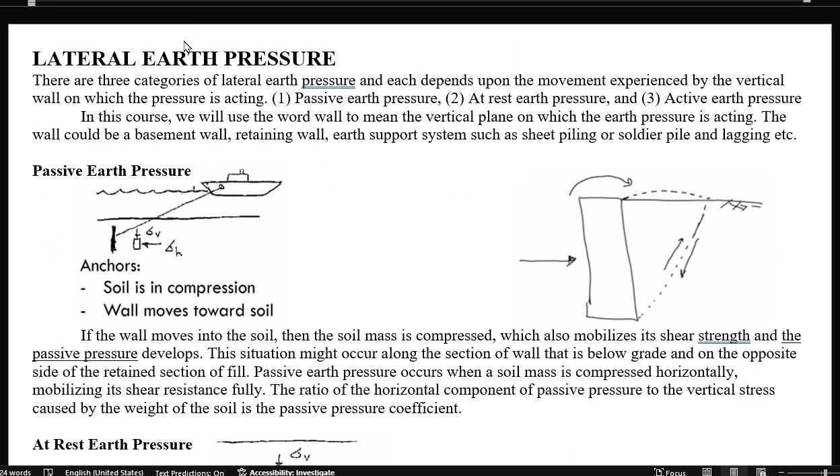And lateral earth pressure is related to the vertical earth pressure by a coefficient termed as at-rest earth pressure coefficient, or that is K sub O, active earth pressure coefficient, or K sub A, and passive earth pressure coefficient, or K sub P. Itong tatlo refers to the three lateral earth pressures, which are passive, at rest, and of course, active. The lateral earth pressure, sigma H, is equal to the vertical earth pressure or sigma V times the appropriate earth pressure coefficient, or this equation.

Yung K, yan yung coefficient. The earth pressure coefficient K is equal to the ratio of the lateral earth pressure, sigma H, to vertical earth pressure, sigma V. Or K is equal to horizontal all over vertical.

K depends on the type of horizontal loading. Is the soil at rest, under compression, or passive, or under tension, or active?

Depending upon whether the soil is loose sand, dense sand, normally consolidated clay, or over-consolidated clay, there are published relationships that depend upon the soil's engineering values for calculating the at-rest earth pressure coefficient.

One common earth pressure coefficient for the at-rest condition in granular soil is K sub O is equal to 1 minus sine phi, where K sub O is the at-rest earth pressure coefficient and phi is the soil friction value or angle of internal friction.

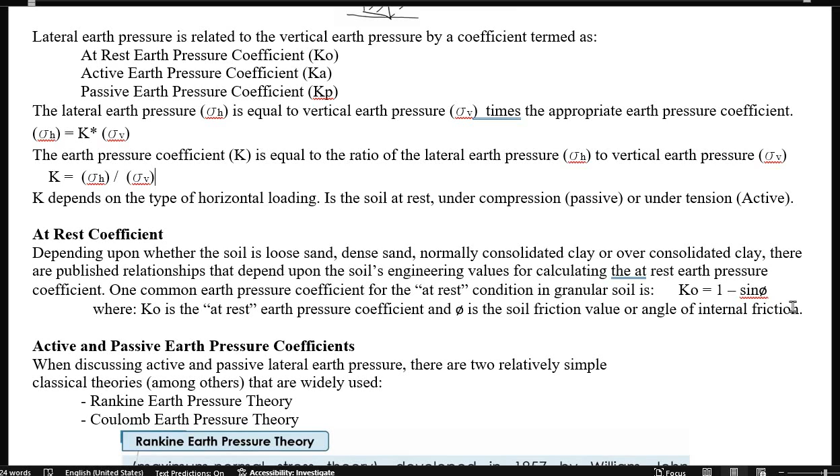Now let's talk about the active and passive earth pressure coefficients K sub A and K sub P. When discussing active and passive lateral earth pressure, there are two relatively simple classical theories that are widely used. So we have Rankine earth pressure theory and Coulomb earth pressure theory.

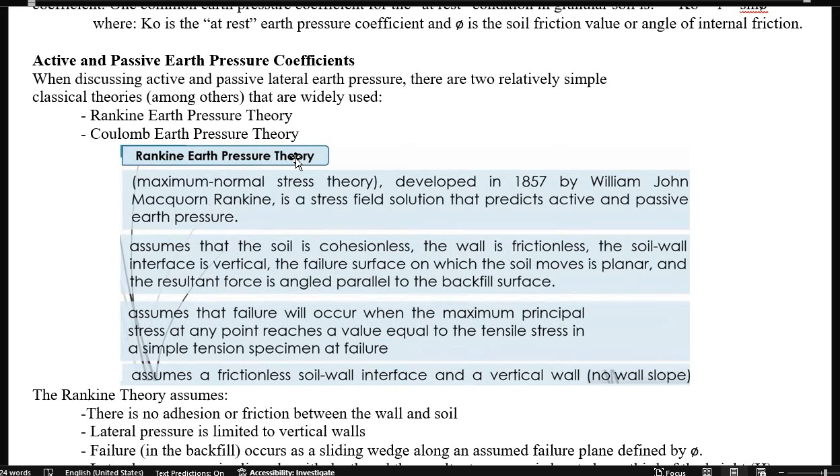Sa Rankine earth pressure theory, it is known as the maximum to normal stress theory. It is developed in 1857 by William John Macquorn Rankine. It is a stress field solution that predicts active and passive earth pressure.

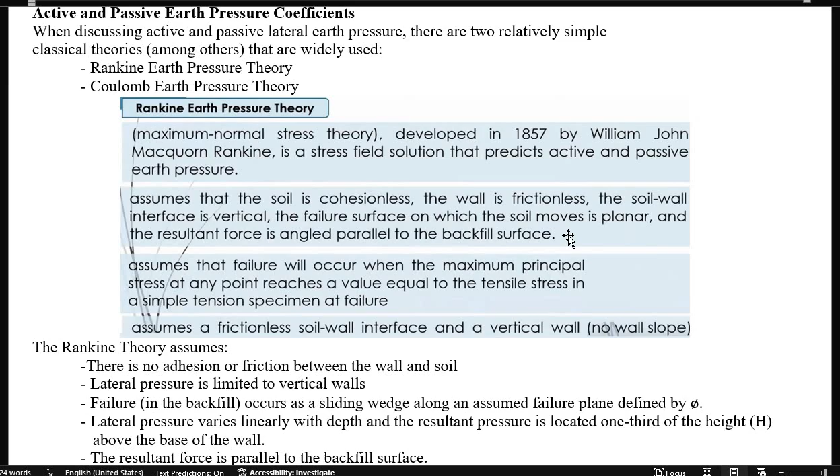It assumes that the soil is cohesionless, the wall is frictionless, the soil-wall interface is vertical, the failure surface on which the soil moves is planar, and the resultant force is angled parallel to the backfill surface. So, the contact between the wall and the soil is assumed to be frictionless. And then, itong contact plane niya is vertical. Tapos, itong diagonal plane or yung failure plane is planar or flat.

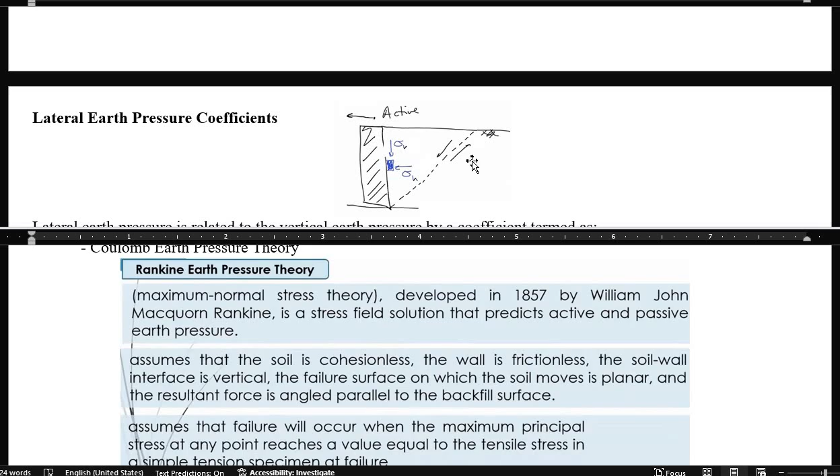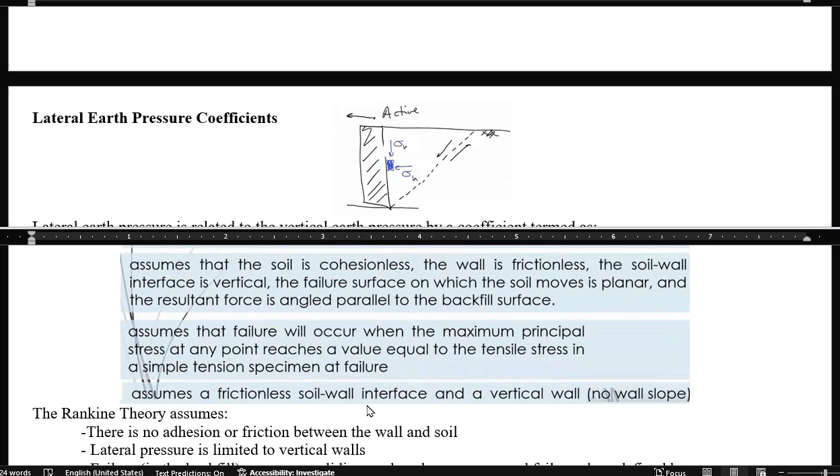It assumes that failure will occur when the maximum principal stress at any point reaches a value equal to the tensile stress in a simple tension specimen at failure. It assumes a frictionless soil wall interface and a vertical wall or no wall slope. The Rankine theory assumes that there is no adhesion or friction between the wall and soil. Lateral pressure is limited to vertical walls.

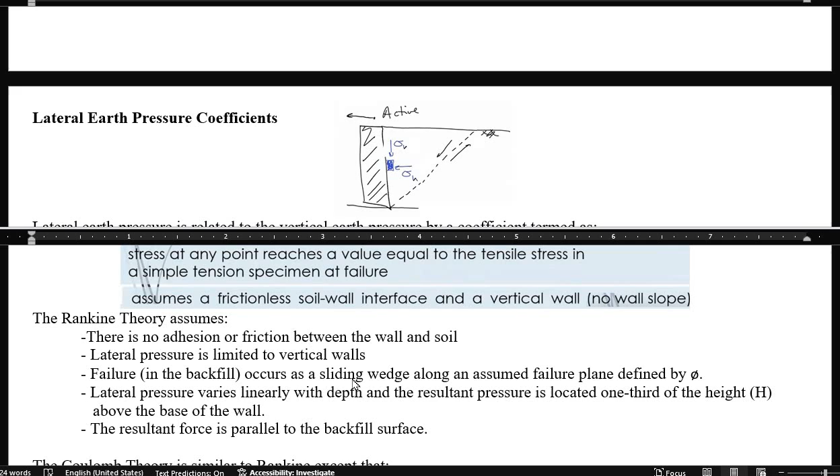Failure in the backfill occurs as a sliding wedge along an assumed failure plane defined by phi. So yung sliding wedge na yan, eto yon. Tapos yung angle of internal friction phi is eto. It is the angle formed by the failure plane to the horizontal.

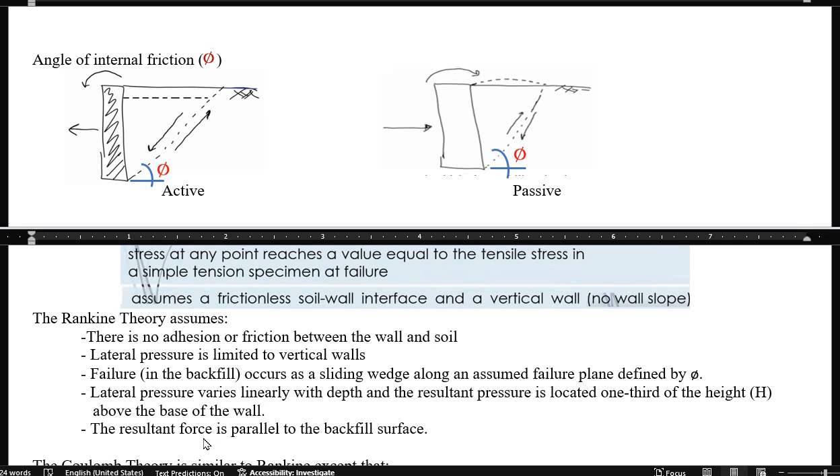Lateral pressure varies linearly with depth and the resultant pressure is located 1/3 of the height. Take note na yung centroid ng triangle is 1/3 above the base of the wall. The resultant force is parallel to the backfill surface.

Next is the Coulomb earth pressure theory. It is similar to Rankine except that there is friction between the wall and soil and takes this into account by using a soil wall friction angle of delta that ranges from phi all over 2 to 2/3 of phi, and delta is equal to 2 phi all over 3 is commonly used.

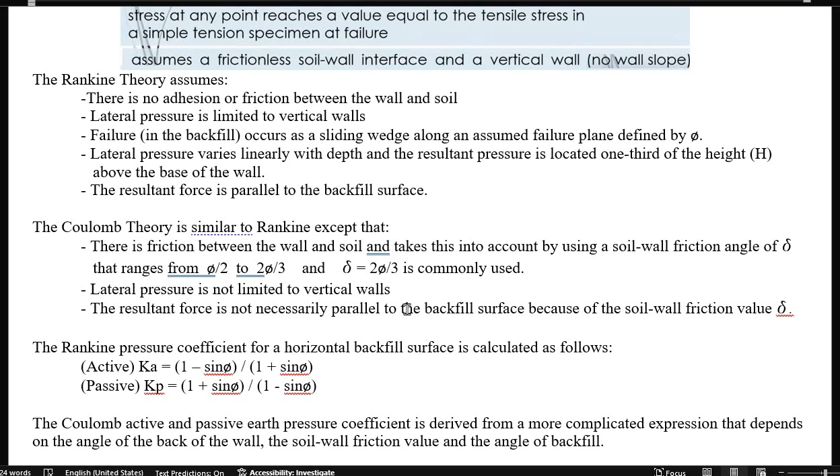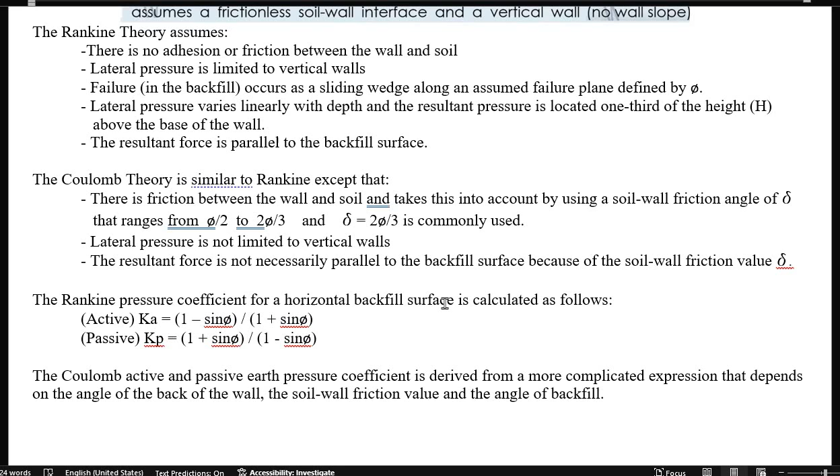Lateral pressure is not limited to vertical walls, and the resultant force is not necessarily parallel to the backfill surface because of the soil wall friction value delta. The Rankine pressure coefficient for a horizontal backfill surface is calculated as follows: K sub A is equal to 1 minus sine phi divided by 1 plus sine phi. And then passive coefficient or K sub P is equal to yung inverse nito.

1 plus sine phi divided by 1 minus sine phi. The Coulomb active and passive earth pressure coefficient is derived from a more complicated expression that depends on the angle

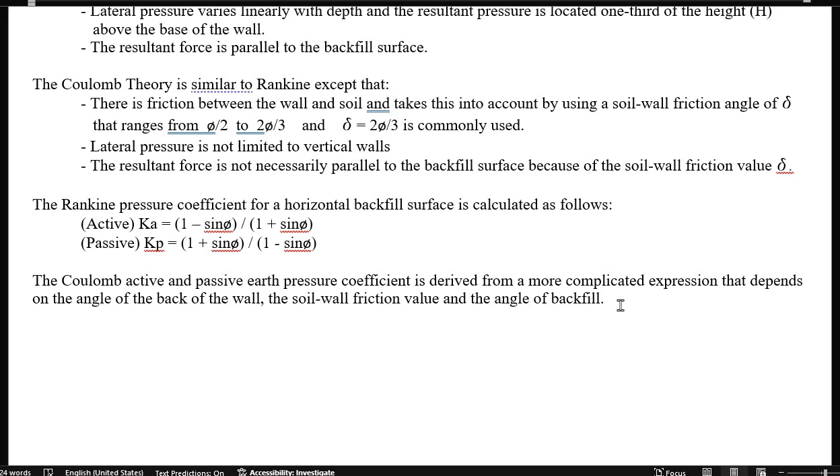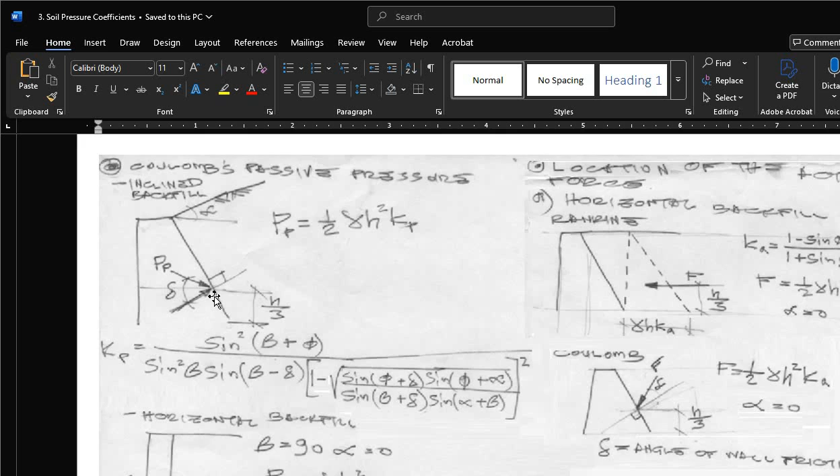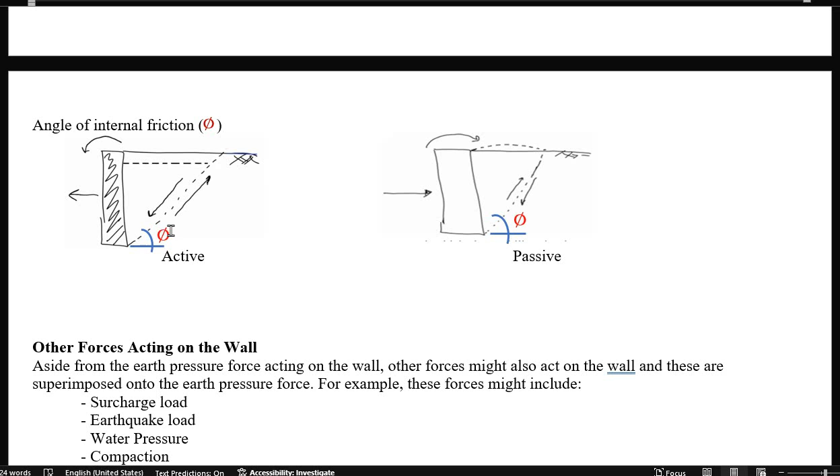Now let's review the figure for active pressure. When active, there is soil tension or extension, and the wall moves away from the soil. When passive, the soil undergoes compression, the soil bulges upward, and the wall moves towards the soil. The angle of internal friction or phi is the angle that the failure plane or shear plane develops with the horizontal.

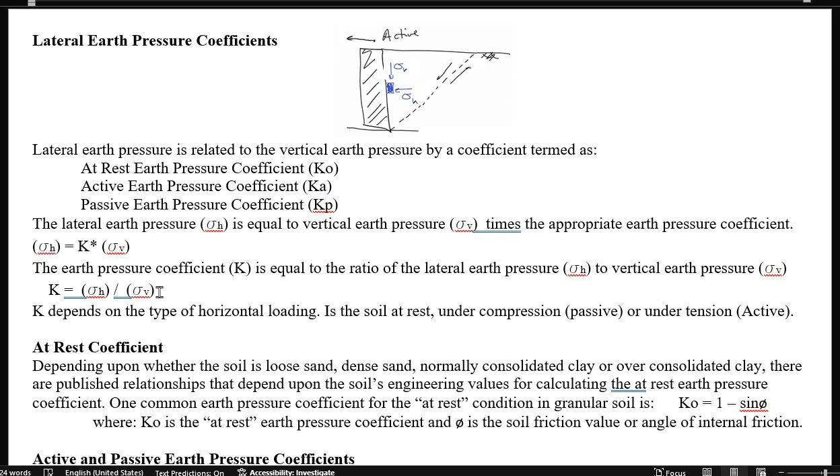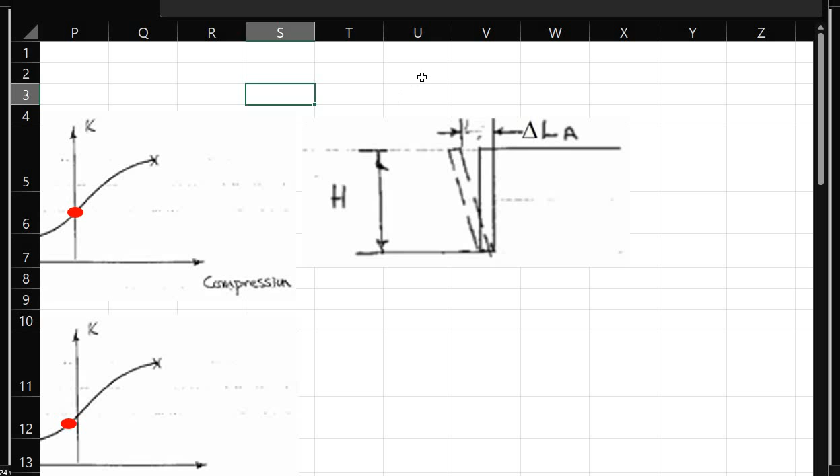Now let's look at the movement of the soil. There is active, where the wall moves away from the soil, and there is also passive displacement, where the wall moves towards the soil. But in this case, we said it's at rest, so the displacement delta L is equal to 0 times H, so the displacement is 0.

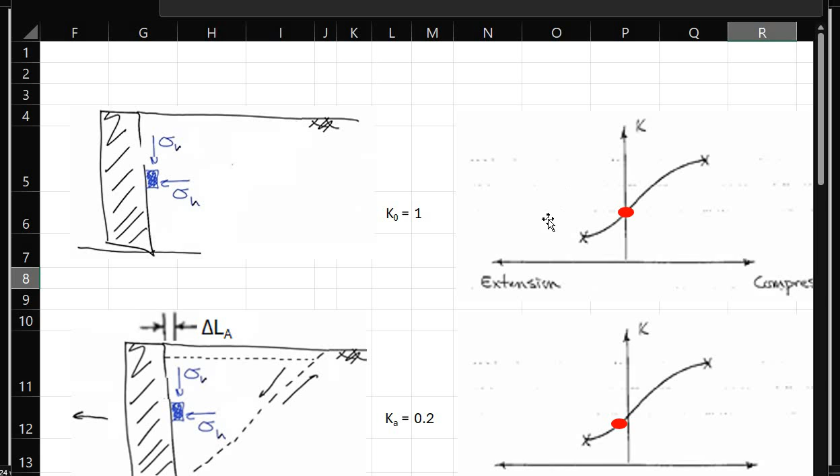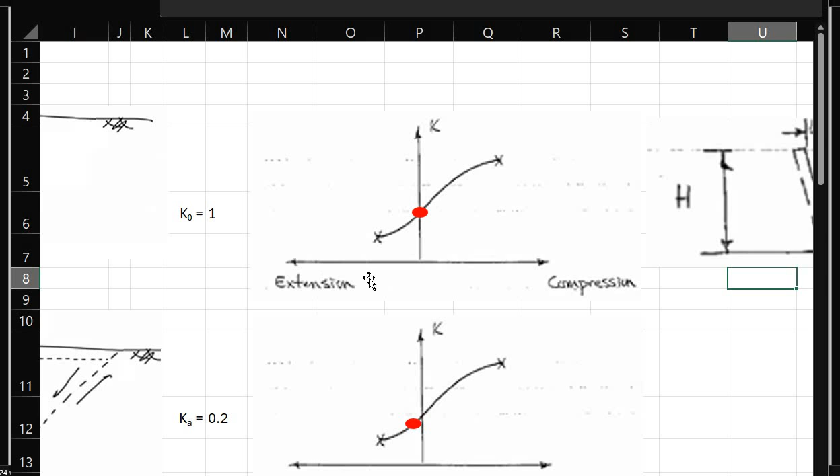Now let's put a diagram here. This vertical axis, let's take this as the K value, and this is the direction of movement. When extension or tension occurs, this is called active pressure, meaning the wall will move away from the soil, so the direction goes this way. And when the wall moves towards the soil and undergoes compression, the direction of the wall goes this way. So that's our figure.

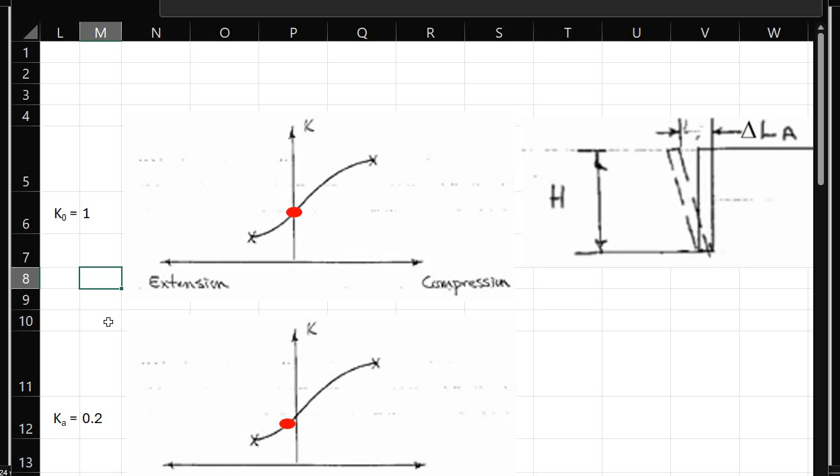So in the middle, between extension and compression, there is no displacement, so the value of K here is 1. Now let's say the wall moves away.

And let's say the vertical pressure remains the same, it stays at 48. From at rest to active, it's still 48. But its displacement is horizontal, so we now have soil tension, or the wall moves away. Because of that, the tendency is that the horizontal stress, from 48, decreases to 9.6.

So in this case, our coefficient now, K sub A, is horizontal over vertical. This is now 9.6 divided by 48, giving us a coefficient of 0.2. So that's equal to 9.6 divided by 48, or 0.2. So our K sub A is 0.2.

So our coefficient, from 1, decreased to 0.2. Take note that our displacement here is extension. Now let's move the wall further. In this case, let's say our vertical pressure is still the same, meaning the height of the soil hasn't changed. But our displacement has become larger.

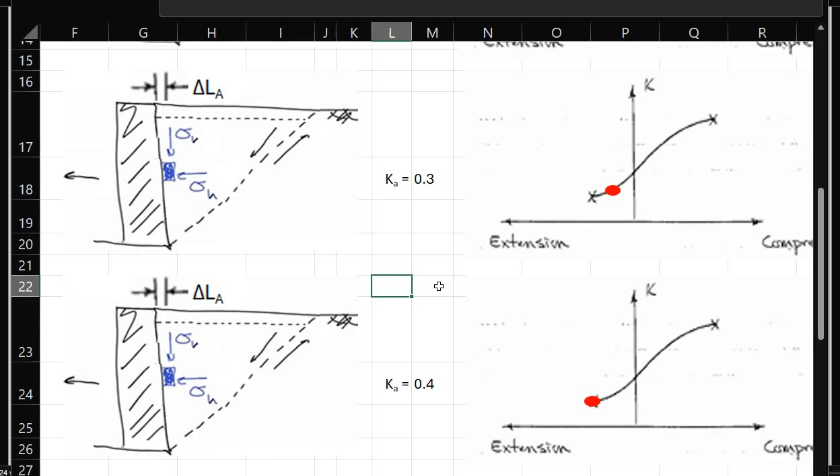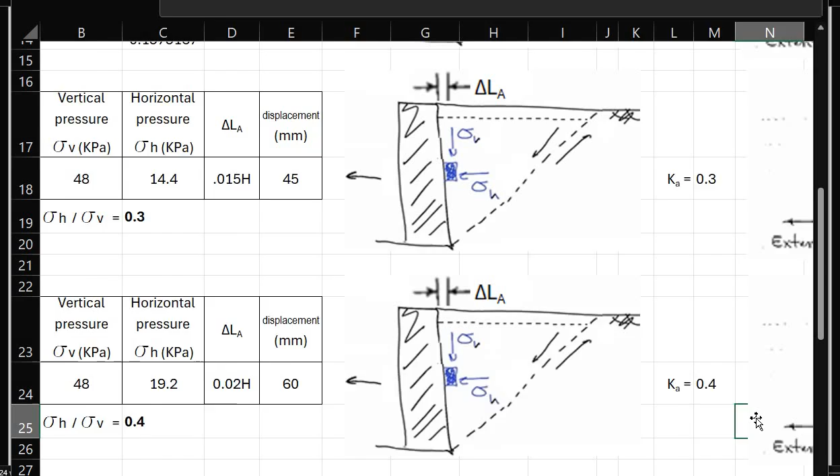Let's say, ang delta L natin ay naging 60 mm or this is 0.02 H. In this case, yung horizontal pressure natin ay 19.2. Ibig sabihin, mas tinulak pa niya lalo yung wall. So, horizontal over vertical is now 0.4. And then, eto na siya. So, lalong bumaba yung ating red or yung coefficient.

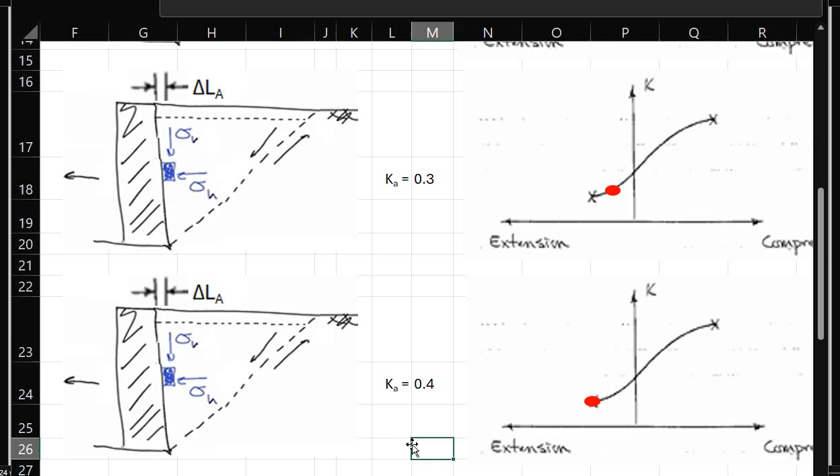Okay? Yan. So, nandun na siya sa may markang X. Katapat na niya. And then, to the point na, let's say, i-move pa natin further away etong wall. So, naging 120 mm na. In this case, yung horizontal pressure is hindi na siya nag-increase. Okay? Nag-retained na siya sa 19.2.

Pero, yung displacement mo, lumaki. So, may property yung soil na kahit gaano kalaki ang displacement mo, magme-maintain pa rin yung horizontal pressure. Okay? So, ito, let's say, ang displacement naging 0.04 H or 120 mm. Pero yung horizontal pressure niya, retained siya, no? From 60 mm na displacement, 19.2 ang horizontal, tapos naging 120 mm ang displacement, still, your horizontal pressure maintains at 19.2. Ngayon, in this case, ang coefficient, active coefficient natin ay 0.4 na.

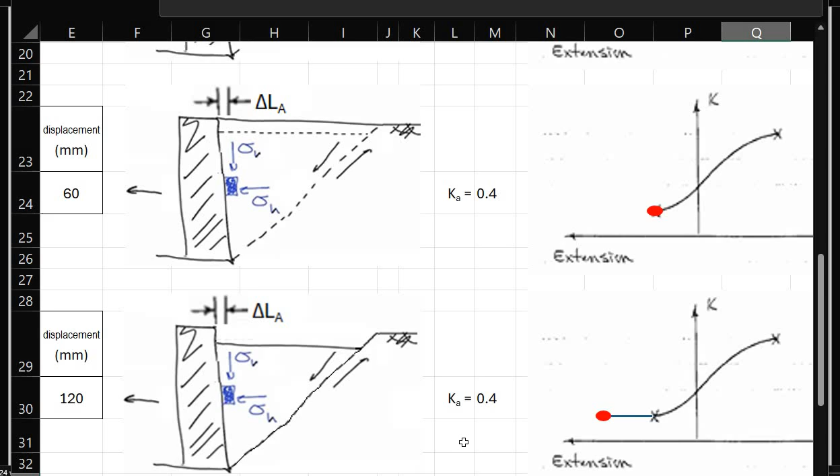Hindi na siya magva-vary. Okay? Hindi na siya lalaki pa ng 0.4. Ibig sabihin, constant na yan na 0.4. Pero, yung distance mo ng displacement, lumalaki siya. Ang tawag dyan ay active failure condition. Ibig sabihin, your shear plane now is developed. Yan.

At, so, ito na ngayon yung drawing niya. Shear plane is developed. Ibig sabihin, yung soil natin is talagang nag-slide na. Mapapansin nyo, dito ngayon yung shear plane niya ay hindi na siya broken line. Unlike dito sa taas, yung shear plane niya ay broken line. Ibig sabihin, hindi pa nag-i-slide yung soil. Hindi pa nagbe-behave as cone.

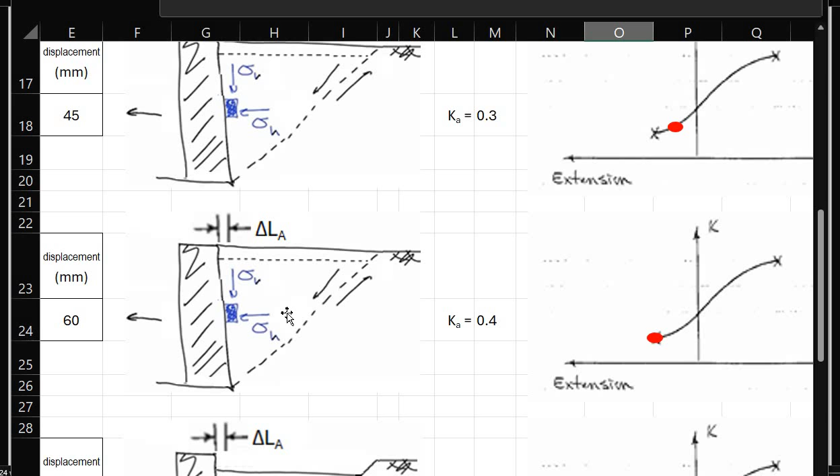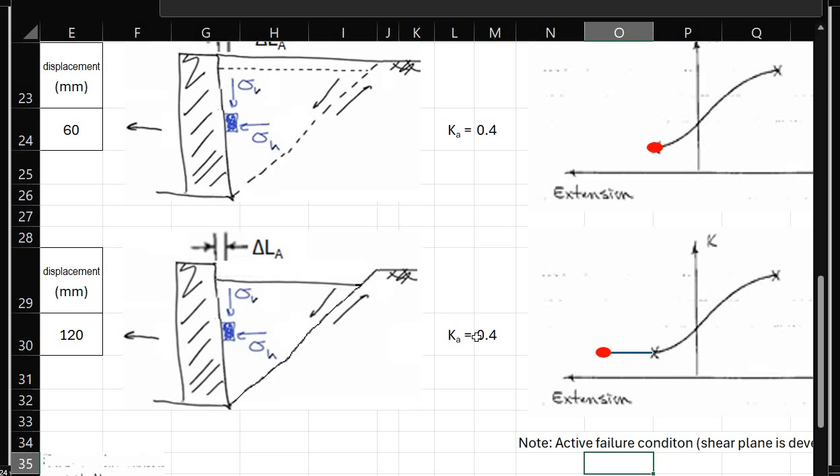Okay? So, ayan na. And then, mapapansin nyo rin na yung drawing ko dito, let's say, since nag-slide away na siya, yung soil mo is parang bumaba na siya ng konti. So, yan ang tinatawag na active failure condition. So, ang condition niyan, ibig sabihin, yung coefficient mo, constant na siya sa 0.4 kahit gaano mo kalayo i-displace.

Now, this is the movement required for development. Ngayon, yung dinevelop natin dito sa active is etong failure condition. Yan yung dinevelop natin. Ibig sabihin, nag-slide na yung lupa, bumigay na yung lupa, gumuho na yung lupa. Yan yung na-develop. Ngayon, para mag-develop yan,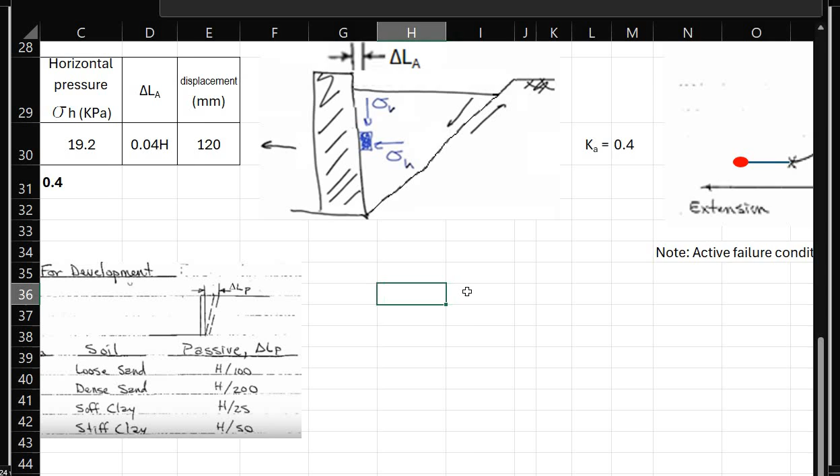for active condition, ang delta L sub A or yung horizontal displacement is equal to H all over 100 for stiff clay. Ngayon, ano yung H all over 100 na yan? Let's say, ang H natin ay 3 meters. So, 3,000 divided by 100, and that is 30 millimeters. And that is for stiff clay.

Let's say, ang soil natin ay soft clay. Ito, H all over 50. So, let's say ang H natin ay 3 meters. So, 3,000 divided by 50 is equal to 60 millimeters.

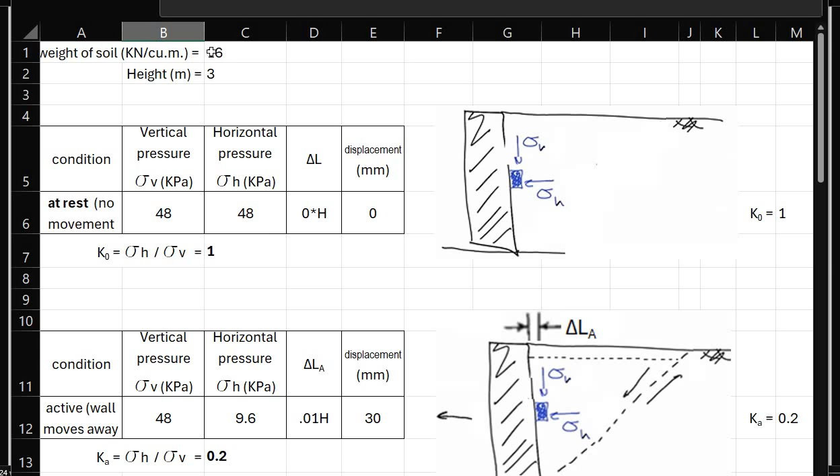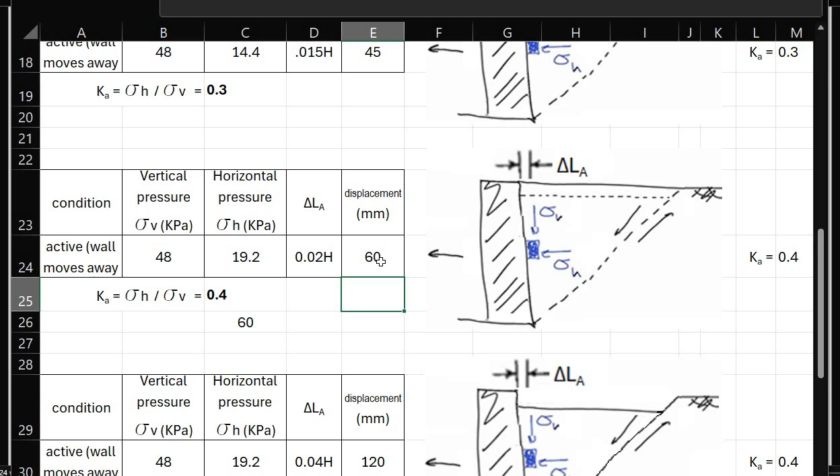Ngayon, balikan natin tong ating figure. So, ang H natin originally ay 3 meters. Tapos, dito, so that is 3,000 divided by 50 is 60 millimeters. Ibig sabihin, at this state, mag-start na tayong mag-reach ng failure condition. Ibig sabihin, at this state, madedevelop na yung failure. Yan. Nadedevelop na yung active failure. Ibig sabihin, anything beyond 60 is, na siya, active failure na siya.

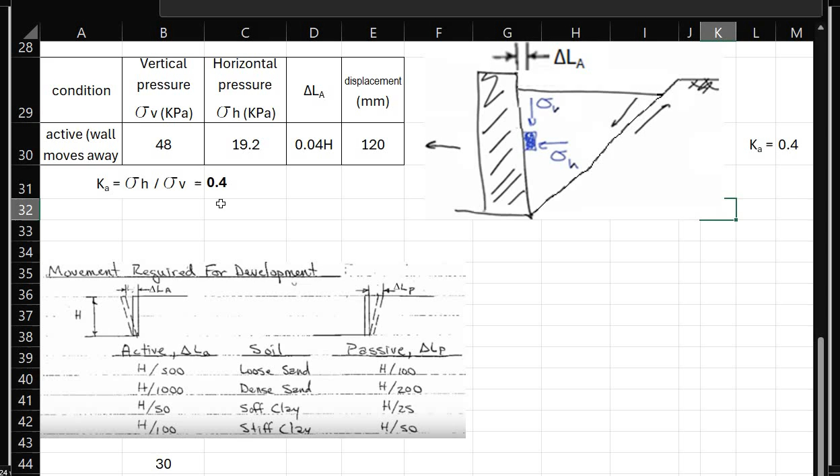So, yan lang yung ibig sabihin nito. So, meron iba-ibang value ng H all over 500, H all over 1,000, H all over 50 for different types of soil. So, ang ginamit kong demonstration dito is soft clay, by the way. Kaya mapapansin nyo, ang range ng coefficient ko dito ay 0.2 to 0.4. Hindi ka na pwedeng tumaas pa sa 0.4.

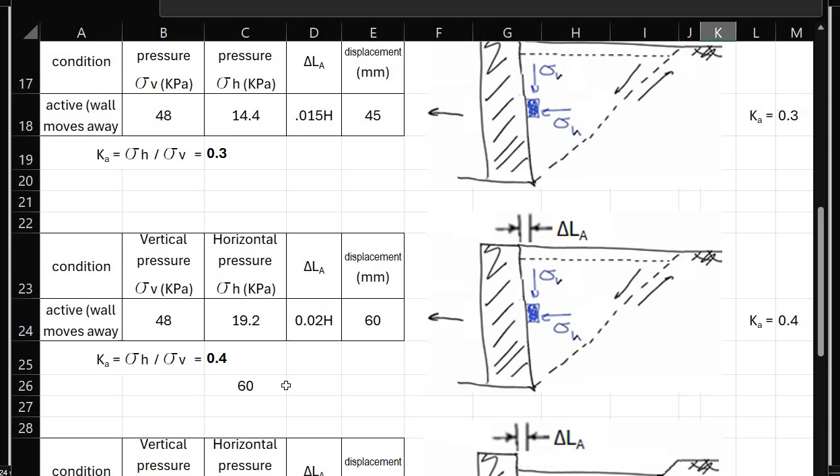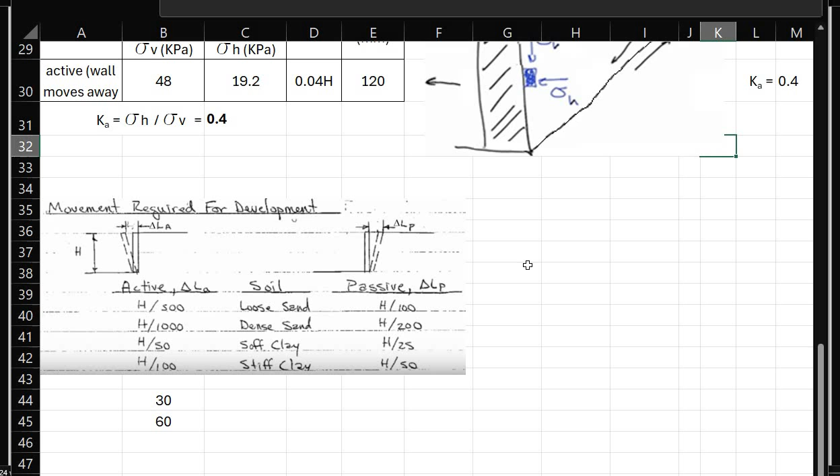Ngayon, since yung movement ng wall is away from the soil, punta naman tayo sa passive condition o yung wall moves towards the soil. So originally,